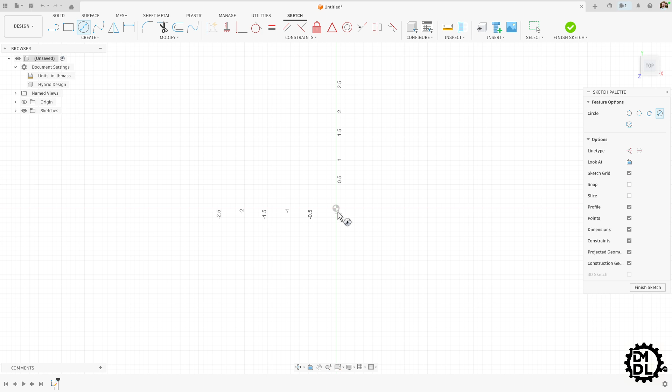Let's start with a sketch, as we normally do. Let's click this top view, and so we're building a burger press, so let's just make it something simple. Let's go with a round burger press. That seems to make sense. How big do we want it? Probably around 6 inches in diameter. That should work just fine.

And now we need some pieces coming off the side, and those are what we are going to bend up vertically and where we can mount the handle. So I'm going to make a line. I'm going to make it a construction line, and we'll come out to the side here.

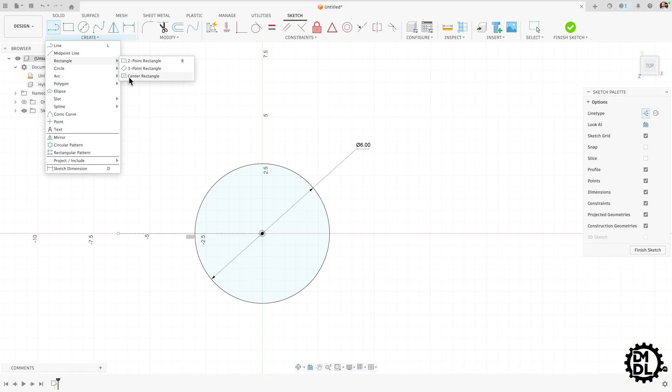And then let's do a rectangle, do a center rectangle, just somewhere centered on this line. Oh, you can see we have construction still on. Turn that off. And we'll just put that kind of randomly for now. We'll make this point and the line, let's make that a midpoint, this point here in this line.

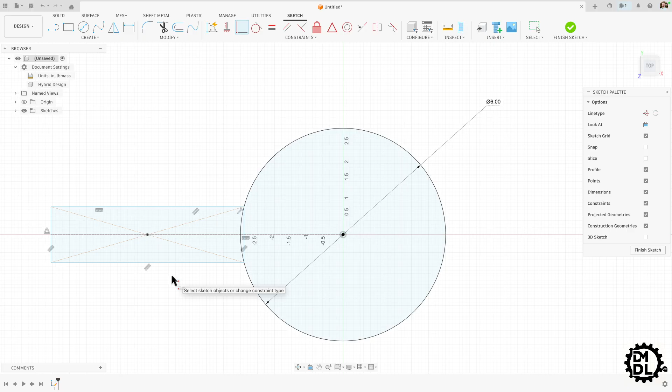And then we want to find a coincident. There we go. Let's make this coincident with the circle there. So now we have a flange kind of coming off the side. Again, this is what is going to be bent up vertically and where the handle will be mounted.

How big do we want this? Let's make it 1.5 inches. And then the length of it, well, we want this thing to be about 4 or 5 inches tall. Let's go with 4.5, and we can always adjust that later.

And now I want this same feature on the other side because we need to bend this on both sides of our center circle here. So let's create another line. Again, make it construction. We want this one to go vertical, so we can use this as a mirror line. We'll come up here, select mirror.

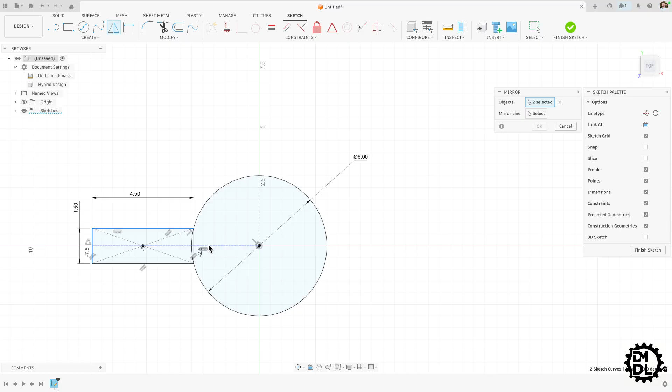It asks us for the objects. So we will click these 4 edges of our rectangle. The mirror line will be the one we just created. And now you can see we have this mirrored to the other side.

Okay, we are already getting very close. Let's finish that sketch. As you can see, we have the beginnings of what will be our burger press. But we need to actually create a body, and we want to create it out of sheet metal because this design will work very well if we make it out of sheet metal.

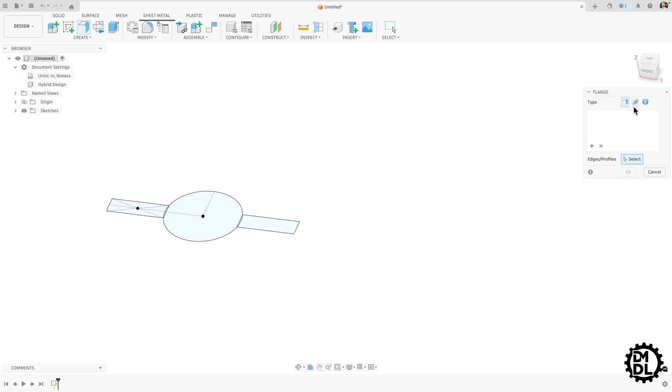So what you can do is start with a flange, and this will ask you to click some of these closed surfaces, and we will go through and click everything that we want to be cut out of sheet metal. Look at that, it looks pretty good.

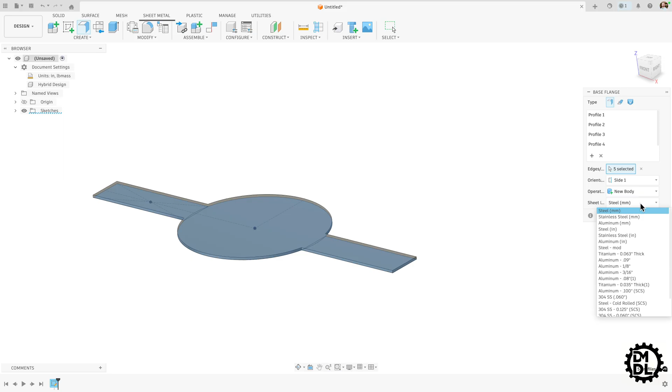But here is something that you may not be familiar with. So this is where you can select your sheet metal rule, which essentially is the material that you will be making this out of, the thickness of the sheet metal, and some other properties around it. And you can see I have a lot of these already created. But how did I do that?

Well, let's go into that first. So we'll leave this sketch as is. We'll come up here to sheet metal rules. And you can see there's this long list of all these different materials and then different thicknesses that I've created.

I've also based some of these off of SendCutSend properties, which is the online shop that I recommend you use if you're building stuff out of sheet metal and you just want it for a good price and a quick turn. They can make parts in sometimes a few days, which is wild, and their pricing is probably some of the best I've ever seen.

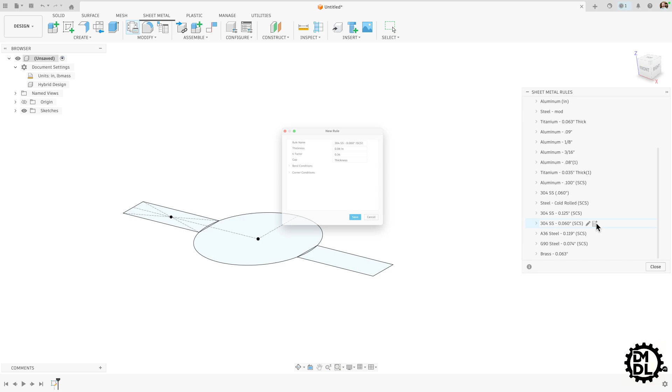Okay, so you are going to want the K factor. There's also some bend conditions. The bend radius is also very important. And there's some other conditions in here which will be important for different types of sheet metal design, but for an introduction, you do not need to pay too much attention to at this point.

Let's go over to SendCutSend and you can see where we can actually find these properties. So here, what you'll want to do, we're already in the 304 stainless sheet metal, but how I got there is going here to this drop down, go to stainless steel, and you will be where you need to be.

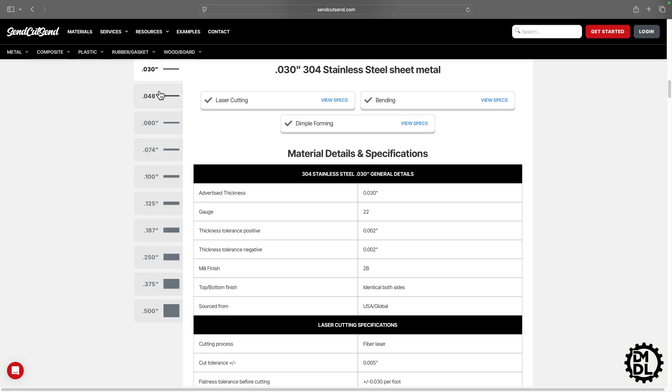You can scroll down and you will see on the edge here, there's all these different thicknesses for the 304 stainless steel. We are going to be working with 60 thou. And so if you click there, you have all these material details and specifications.

So if you're laser cutting this, you are going to want to pay attention to a lot of these details. Some of your minimum bridge sizes, so you know how thin you can make some of these parts of your sheet metal piece, your minimum hole size, your minimum hole to edge distance, something like this. These are all things that are very, very important when designing parts that are going to be laser cut and are made of sheet metal.

But for this tutorial, we care about the bending specifications. So if we look through these, you can find your effective bend radius at 90 degrees is 70 thou, so keep that in mind. And then the other big one we want to find is K factor right here. You can see that the K factor is 0.34.

So we go back over to Fusion. This has already been inserted into this new rule. I made this quite a while ago. And you can see the K factor is 0.34, and we will discuss the impact of that on the sheet metal design in just a few minutes.

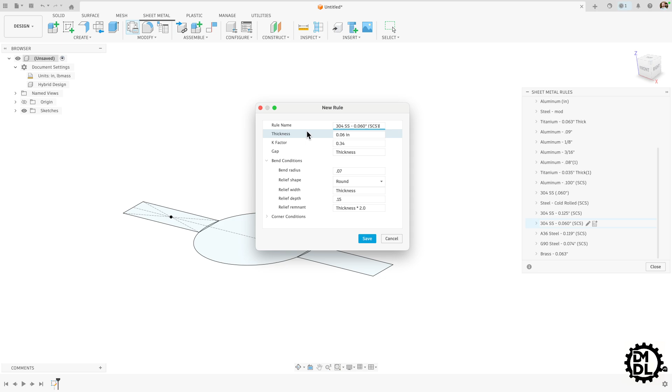You can also see the thickness is here, the bend radius 0.07. So we are ready to go to use this new rule for the part we are designing. So let's hit save, close out of the sheet metal rules, and wait for this to load.

There we go. Let's go back up to our flange. Here we will select our closed profiles. There we go, and here we have our sheet metal rule. Let's see if I can click there.

Let's scroll down and find the rule that we were just looking at. That's 304 stainless steel, 60 thou thick from SendCutSend. Click that, hit OK. And now we have the beginning of our burger press.

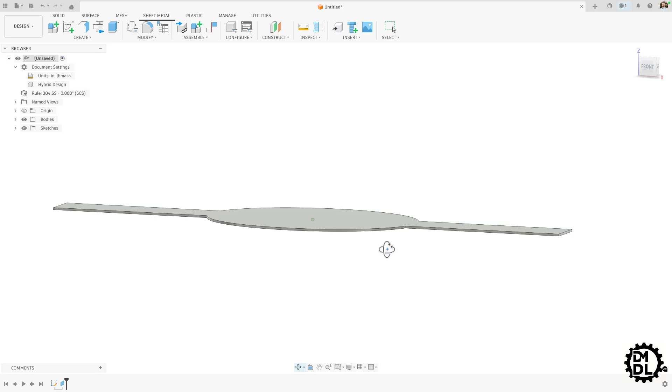This is what is going to be cut out of the sheet metal. And looking at it, you might think that looks a little bit too thin for a burger press. And the nice thing is, this is very easy to edit.

So we go back in, double click on our flange, and oh, that is something else. We'll go here, double click. And oh, actually, I am showing you the wrong approach to this.

If you want to change your rule or the material or the thickness that you're using, you can actually just come right up here and double click on that, or click here. There we go. Okay, so it took a little while to find it, but essentially you can just switch the rule by clicking on this button that pops off to the side. That is going to give you this little pop-up here.

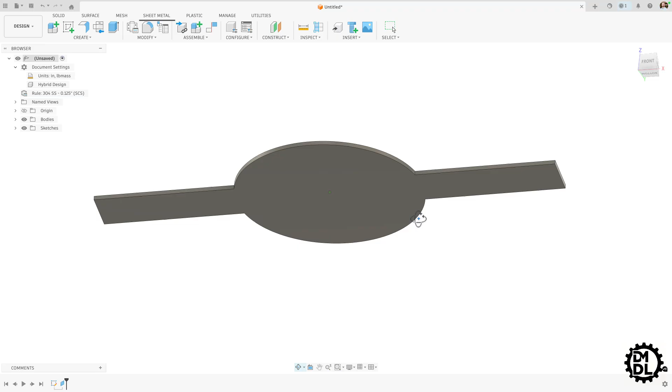Drop that down, and let's see, the 60 thou is a little thin. Let's go with 1/8 inch. Let's see how that looks. Okay, that looks perhaps a bit too thick, but let's just keep going and see how this all shakes out.

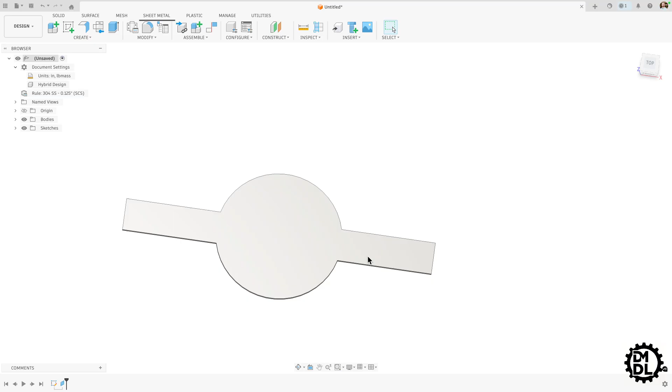So what's next? You want to think about this, how it's going to be manufactured. So from a top-down view, you can see this is all going to be laser cut out. We want to get it to a point where we can have it laser cut in the shape we want, and then it will actually be bent. These two sides will be bent vertically, and that is where we can mount our handle.

You often don't want hard corners in a laser cut part. Corners often lead to a place where the laser has to stop and change direction, which can cause heat buildup and some deformation, so it's not ideal. It also doesn't always look as good. So let's add some fillets.

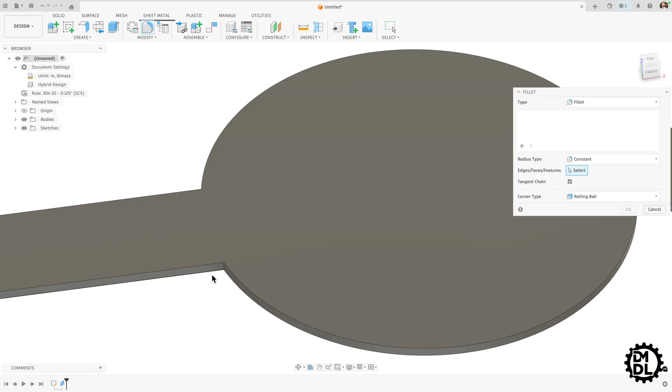We'll zoom in here and add a fillet in each of these corners. Let's see, 0.15 - let's make it a little bigger, let's go 0.25. Zoom back out. Okay, that's looking good.

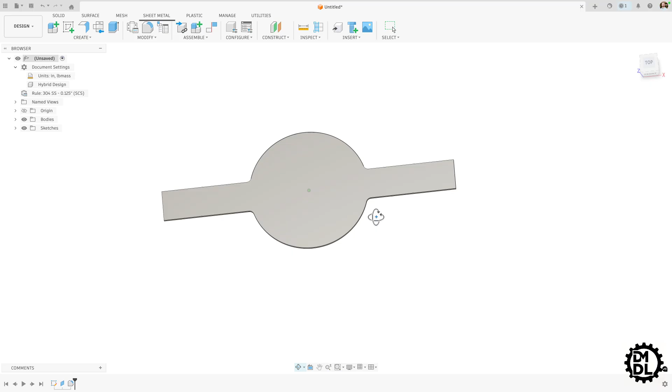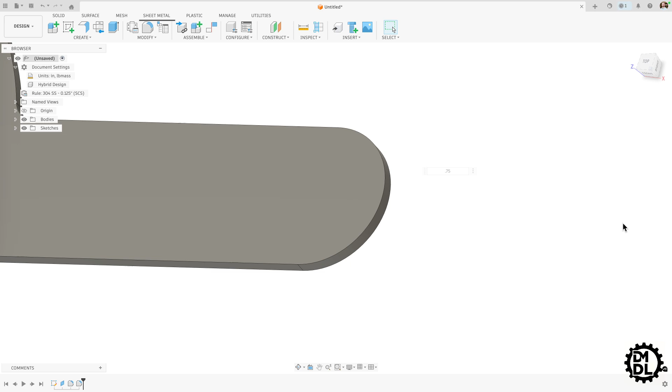We also probably don't want hard corners on the ends of this, so let's add some fillets there. Make sure we click the right edge, and this final one. We know the width of this is 1.5, so let's make the radius 0.75 and we'll have a nice rounded end. This makes sense because the handle we are going to design for this will also be round, so everything will flow aesthetically and look really good.

Looking at this one more time, I think these radii are a little too large. I'm going to edit those. Let's drop it down to 0.15 again - I think that will look a little bit better.

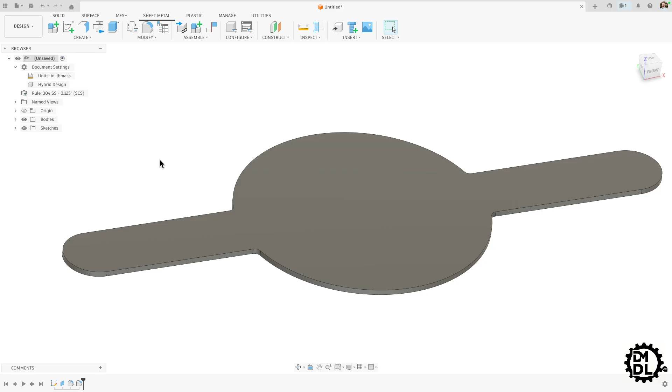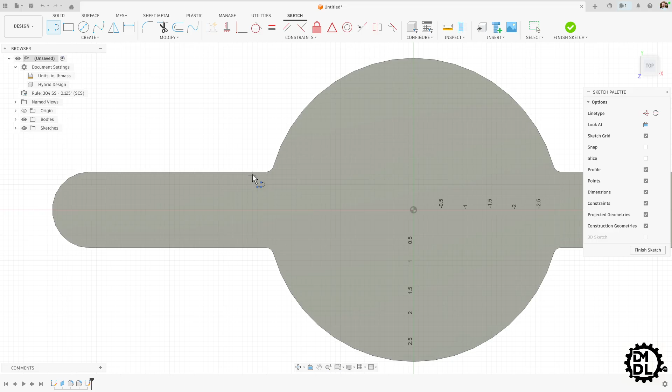Now we need to add some lines, which will be the bend lines. Those will tell us the center at which our bend will bend around, the center of that bend radius. So we're going to create a sketch on the top of this and add in these bend lines, which are pretty simple. Just click the line tool, bring that vertical, come over here, and add one on this side as well.

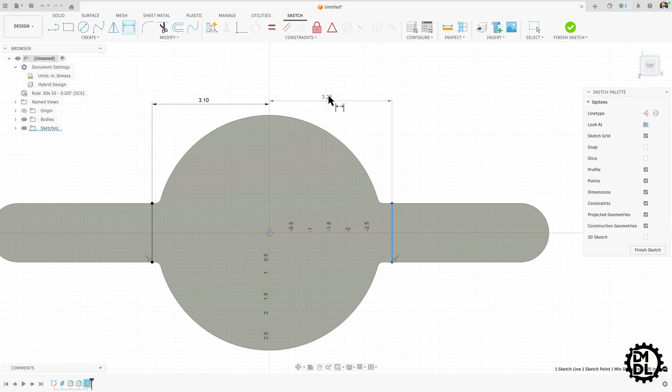We want to make sure we're dimensioning these so that we have the same distance from the center point. Let's make that 3.2... 3.15... let's go 3.1 actually on that. Make sure it's the same on the other side - 3.1. Then we can test out our bends and see what we think.

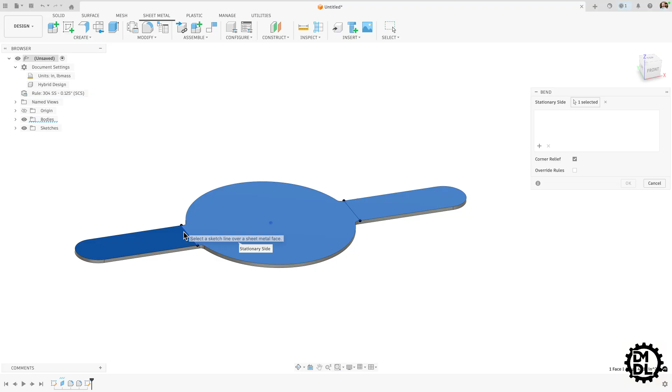Let's finish that sketch. We'll come back up here to create, and we want to do a bend. Click that. It's going to ask you for the stationary side first, which will be this side, and then you want to click the side that is going to be bent vertically. Instead of clicking the face out to the side, you want to come up close to the bend line here, and there it is - it bends it up and shows you a preview of what it's going to look like.

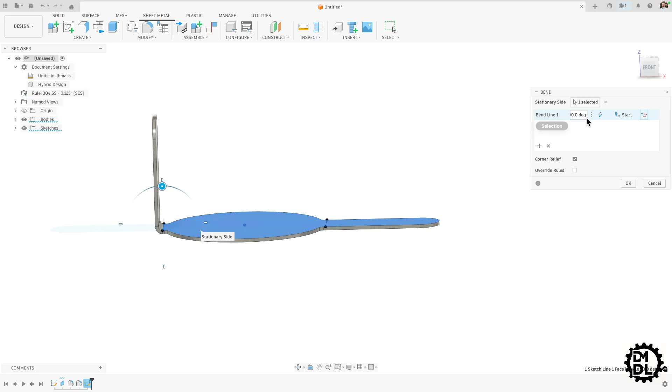There are a few things you can use to adjust this bend. You can grab here and change the angle of your bend. We're going to want 90 degrees, which you can see over here. You can type in 75 - oh, I hit enter and it's taking a little while to load, but that put it at 75. Probably not what we want for this burger press, so let's go edit that. Let's switch it back to 90. I keep hitting enter just out of habit, but we want to keep this dialog open.

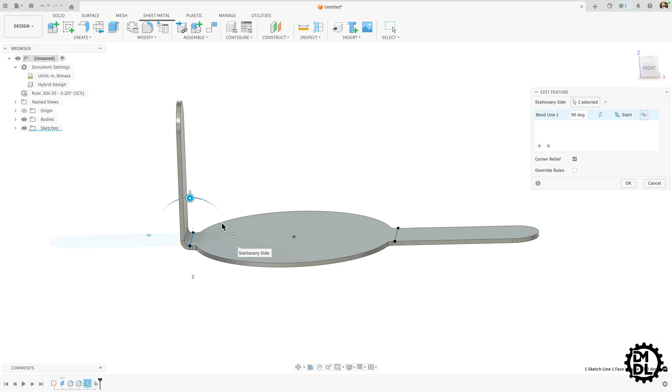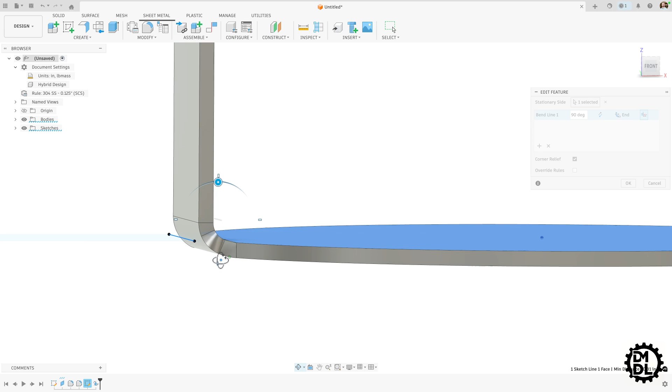One other important thing is the bend line position, and this just tells you where your bend is actually starting. Here you can see the bend is starting right after the line we just drew, and that is set right here. We can also move it to where the center of the bend occurs where the bend line is located, or you can change it to the end. In this case, it's going to be a bit funky if we change it to the end - as you'll see, our radius we added is kind of deformed. That might work in some situations, but here I think our best bet is actually going to be the center.

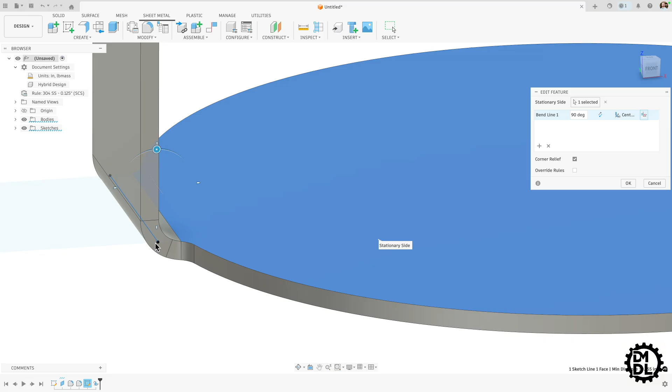I'll click that one more time, and here you can see it looks pretty good. There's not much unwanted deformation happening in this corner here where we added our fillets, and overall I think it will look pretty good.

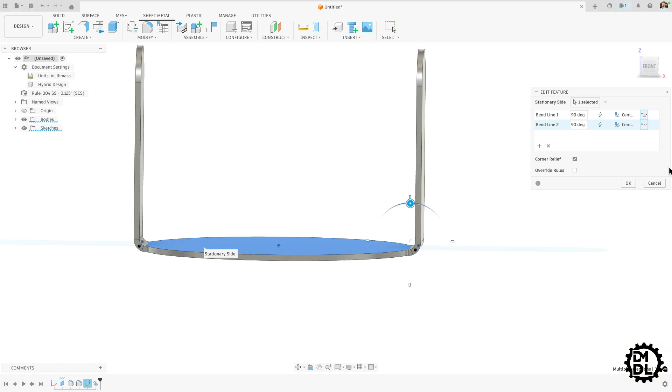We want to add another selection, so we will select our face here and then the side we want to be bent up. Again, we want to make sure the bend position is the same and that we are getting the same result on both sides. Click OK. A way to make sure we have the same settings on both of our bent flanges is just to make sure those are at the same height, and it all looks good.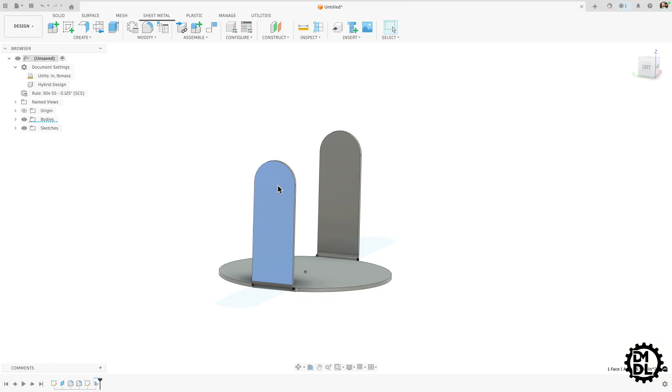So here we have essentially what we will order from SendCutSend, but we are missing a few critical features. We want to be able to mount a handle that goes from one side to the other. So we're probably going to need some holes. So let's create a sketch on one of these sides. Okay.

We want these to be centered about the center point of this curve here, of this radiused edge. So let's create a construction line. Let's find the center point of all of this. There it is. Come off to the side. Okay. So here we're going to use these 2 points to locate our through holes that we can use to locate our screws that will actually be holding the handle onto this burger press.

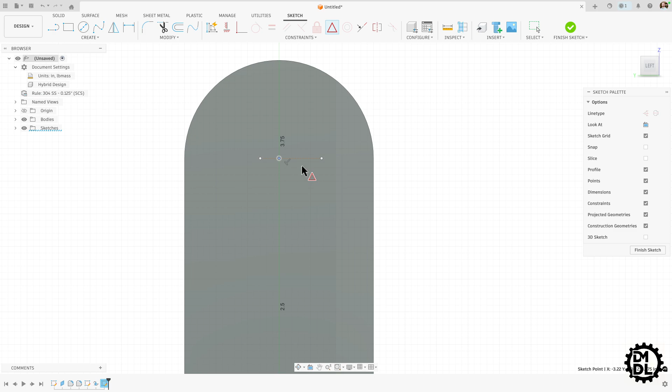We want this to be centered. So let's click that point and then this line. Okay, that's centered. Our spacing, let's make it 0.65. That looks about right. Finish the sketch. Okay, so now we have our location for these holes. Let's actually add those. We'll go to solid. We'll go to our hole tool here.

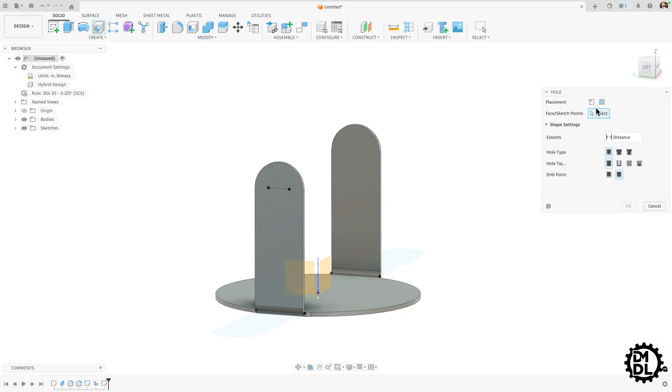And now we need to select our points. Select 1 and 2. And as you can see, the default are massive holes. So let's make sure to update that. Let's see, what do we want? A clearance hole. What size? We can probably do M3. No, let's go with some M4s for this. And that is probably good.

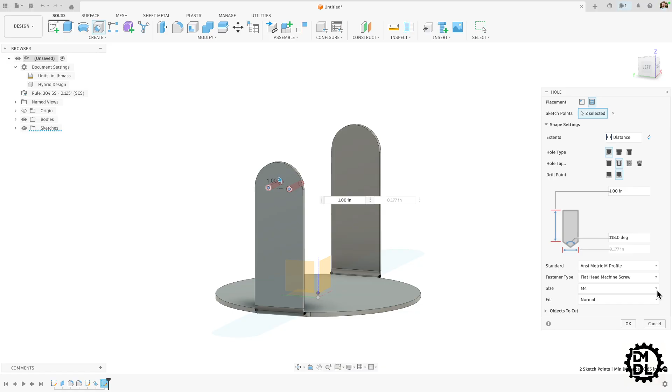But we want to go through both sides. So let's change how far this goes. Look for the extent of it. Right now it's a distance. Let's just go through all. And that will create our through holes on both sides. Okay, now that is done. Now we need to create our handle real quick and we will be done with this burger press.

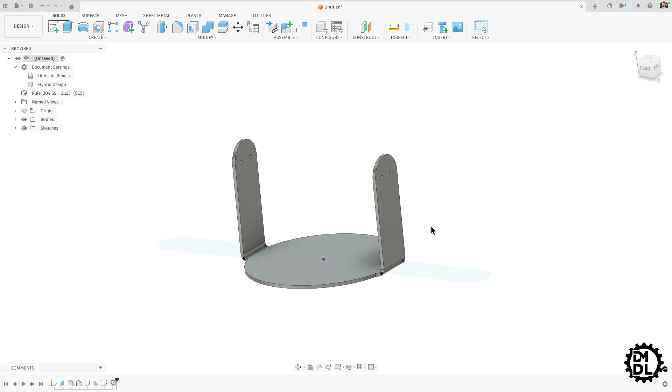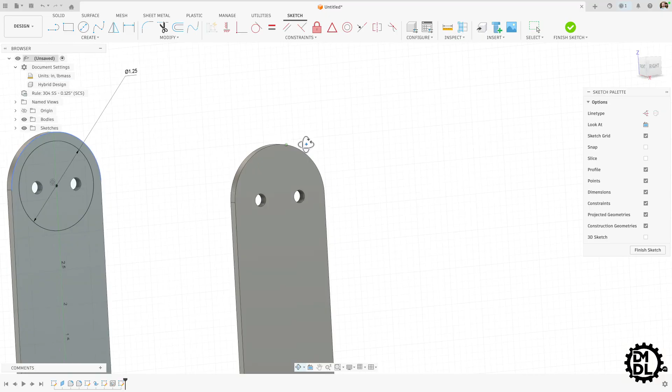So click on this face here. Let's create a sketch on that face. And this is going to be our handle. And I'm just going to assume we want our handle to be made out of wood. Find the center point. And it will be very aesthetically pleasing, as well as a useful and durable handle. And we can also use wood screws then to attach it to our bent sheet metal piece.

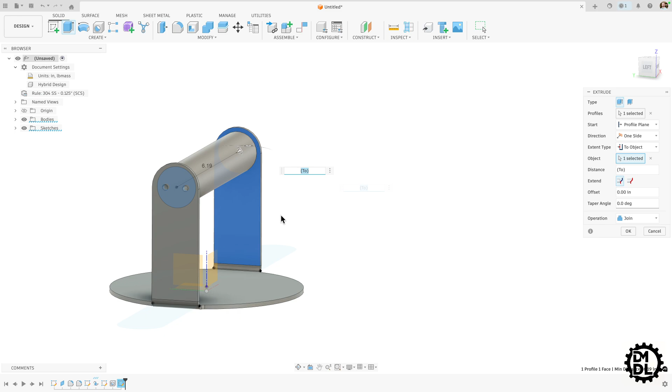Let's do an extrusion from this face. And we can either pull this out or, instead of distance, we can do to an object. We'll come up to this other face. There we go. There's a few issues. This pulled our clearance holes all the way through the part, which we don't want. So let's go back to object, see if we can click these other faces. Oh, that is not the object we wanted to click.

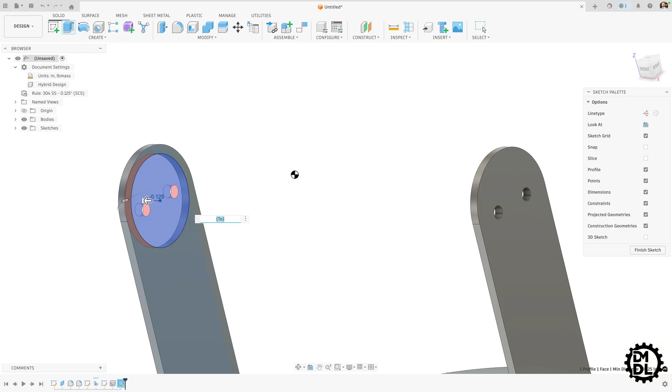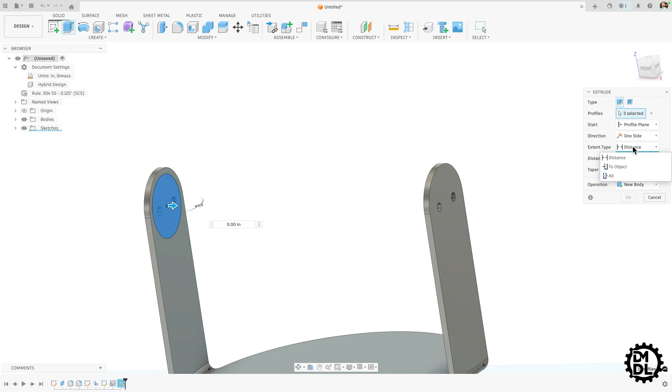Let's start over with this. I kind of got it a bit messed up, just to make sure that we are doing this clearly. So again, we're going to do an extrusion. We need to click the profiles that we want to extrude. In this case, we want to make sure we are clicking the profiles of our through holes, as well as this overall circle, so that we can create this handle without having the through holes extruded through the whole thing. Now we will go to distance, to object, up to this face.

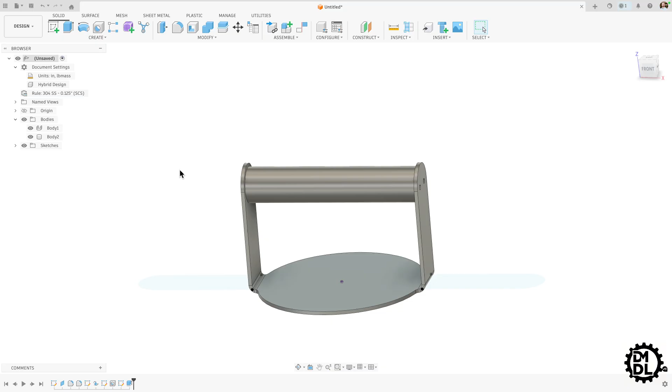And here it looks like it's all the same material. And that's because we have the operation set to join. We want to make sure we make this a new body. Now it will be a separate body from our sheet metal. Hit OK. And now just to confirm, let's check our bodies. We have one sheet metal body, which you can tell is sheet metal because of the little sheet metal shape here. And then our other body is just a normal body and it is separate. We can hide one or we can hide the other.

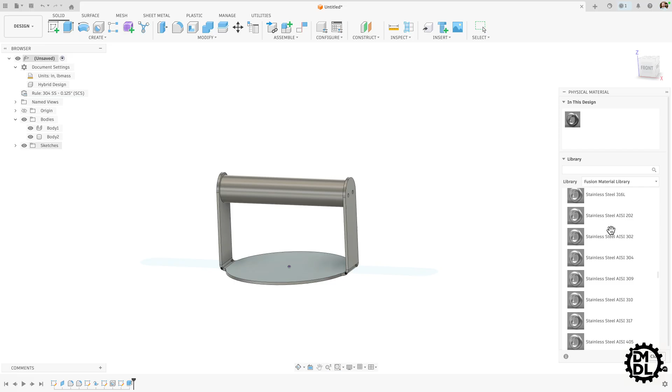Okay, so now let's add some materials to this and we will finish up this smash burger press. So let's go to modify, physical material. We want the sheet metal to be metal. As we said earlier, it's 304 stainless steel. So we're scrolling down, now we're into the stainless steels. There's a few different kinds. Here's 304 right here. Drag that over and apply it to that body. Okay. It's kind of annoying. We have some of these sketches showing, so let's go ahead and hide that.

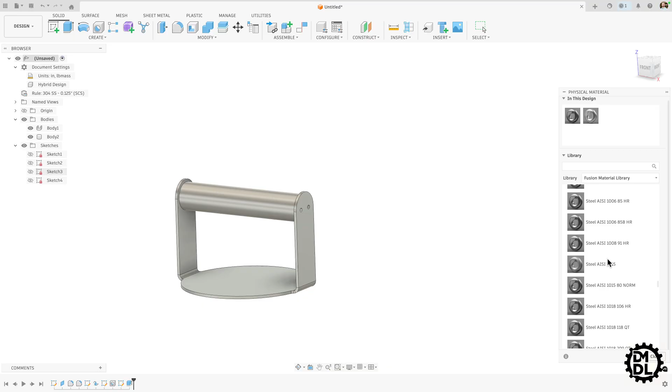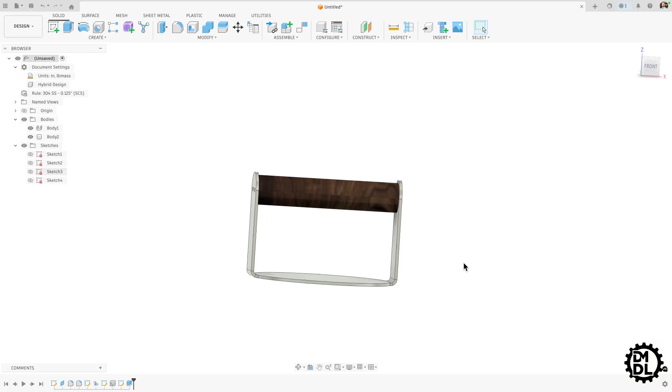Okay. And now we also need to add a material to this handle, either a material or we can add just an appearance. That will also work. So let's get out of the metals here and see what we have for options for wood. We want to make this out of wood, so what do we got? And you can scroll through pine, walnut, oak. I think walnut will look pretty good on this handle. And there we go. So now we have 304 stainless steel for our sheet metal and walnut for our handle.

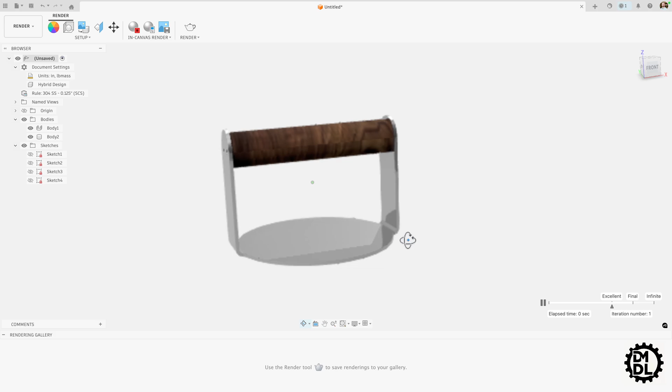And if you want to get an idea of what this will look like in real life, you can always come up here and easily switch to the render tool, which is one of the things I love about Fusion. It's very quick and easy. You can do an in-canvas render, and right away you start to see kind of what this is going to look like in real life.

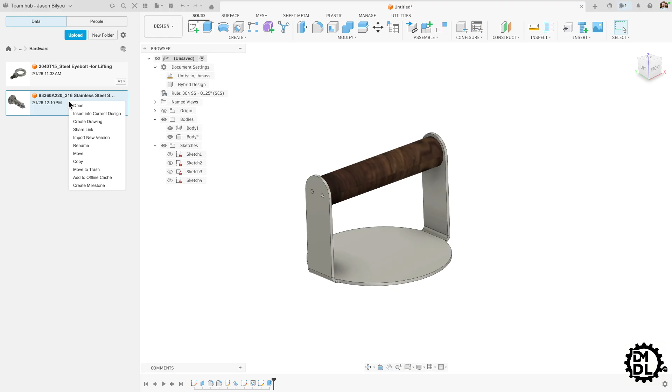And if you want to add screws, that is easy to do as well. I would recommend going to McMaster and adding some screws. I've got a few that we can probably just add in right now. Let's go here. Let's go to our YouTube tutorials. We got some hardware, and here we go. Here's a screw. We can right click, insert into current design, and let's see. There is our wood screw.

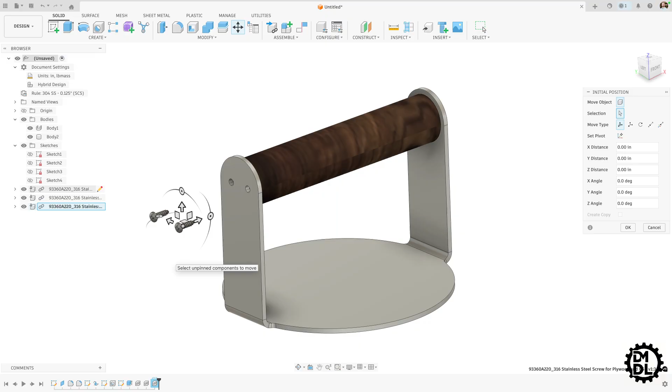Let's add a few more of those. We'll hit OK. Let's get rid of that. Click on the screw, and we will just simply copy and paste a few more. There's 2, enter, 3, enter, and 4. Okay. We will assemble this. We're going to need a joint. And this is something that I will go into more detail in a different tutorial.

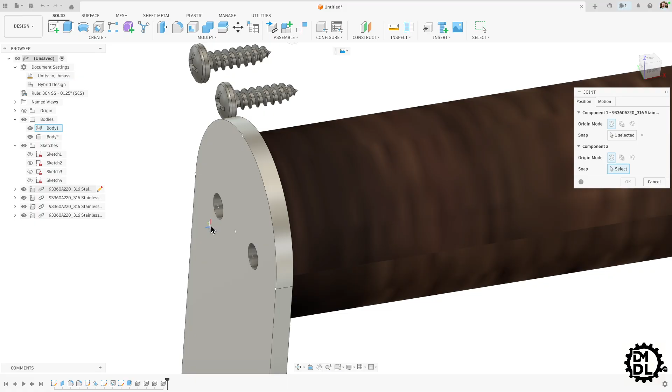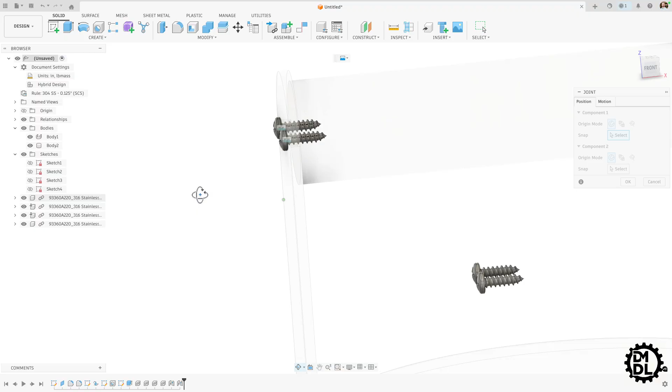So let's go to one of these screws. We're going to add a joint right there. And we want this to be located on this hole. Okay, and so that is assembled. Let's quickly go through and do this for the rest of our screws. And I have J set to a hotkey for joints, so it makes it really easy to pull up that tool. There we go. Do on that side. And we will keep going to these other ones.

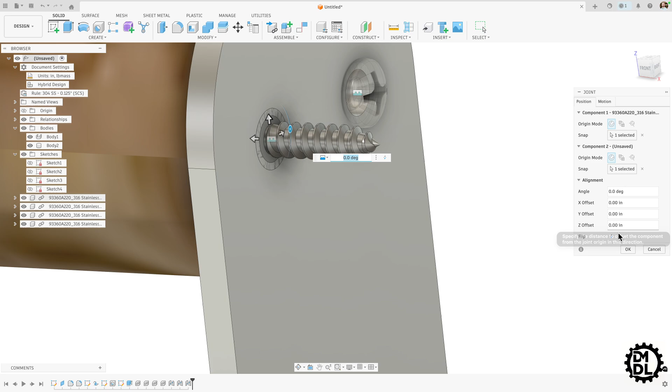Insert it on these holes, and now you can see it's pointing in the opposite direction. We'll quickly just flip that. Okay. Add the final one here. Make sure we get this the correct point for this joint so that they line up in the location where they will need to be once it is actually installed. And there we go. Now we have our screws, we have our wooden handle, and our sheet metal burger press.

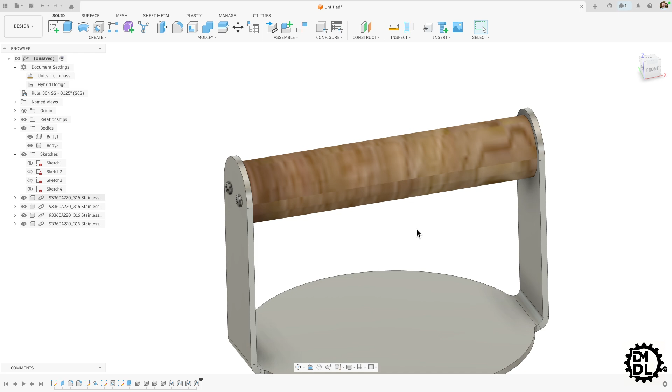And sometimes these can be a little bit annoying. So a way to get rid of these, which essentially just show you that you have a fixed joint at that point, you can go to your display settings. And if you look through here, you can see what your object visibility is. We want to get rid of joints, and now those are gone. So if you find those visually annoying, there's an easy way to hide them.

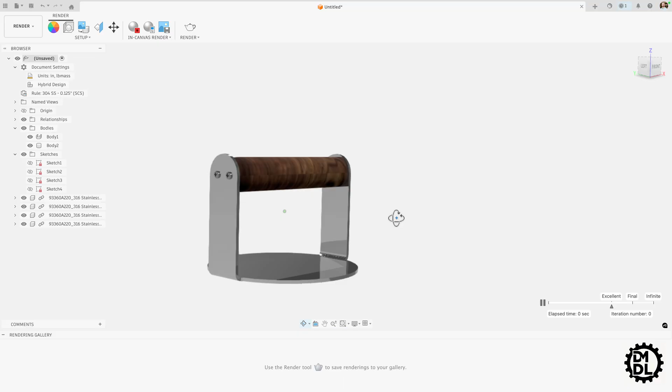Let's hop back over to our render tool. And now you can see we have our screws in there, which makes it look even more like a finished design. And with this in-canvas render, we get a pretty realistic idea of what this tool, the Smash Burger Press, will look like. And that is all for this.

So that is a quick introduction to sheet metal. I thought it was useful to show you how to do this on a real tool. You could actually go and get this made from SendCutSend in minutes. I could upload this right now, get a quote, and press order in the next 15 minutes and have essentially the core part of my Smash Burger Press.